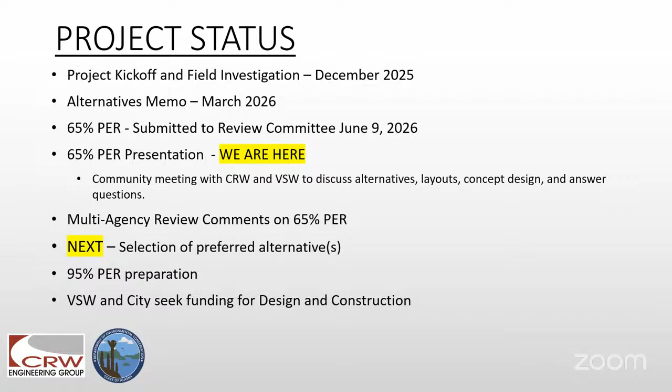We expect multi-agency review comments anytime. They are pretty stacked up. They don't send their comments in a very timely manner, it seems. But we hope to get those in August in concurrence with the same timeline as when the city will be making selections for the projects that they would like to pursue. Next.

I'll let Andy take over here and talk about the purpose of the project and then the suite of different components that are within the PER, including the dam, the water transmission line, the distribution mains, and the wastewater collection mains. So go ahead, Andy.

Thank you, Lori. Again, my name is Andy Horazdovsky, and I was out there in December, along with Mike Leganici, taking a look at these different items that are part of this preliminary engineering report. I was also out there in 2014 and 15, looking at some of the wastewater and influent issues into the lagoon, and took a look at the dam out there and the septic system.

So I've been over there a few times and I'm pretty familiar with the systems involved there, water and sewer. And of course, CRW was involved with the 2018 water treatment plant and water tank projects that occurred up there.

So this preliminary engineering report, usually these PERs cover one or two items. This one is unique in that Village Safe Water let the city come up with a whole list of issues that are persistent and need to be addressed, and it involves 10 different items relating to the dam and some water mains and sewer mains.

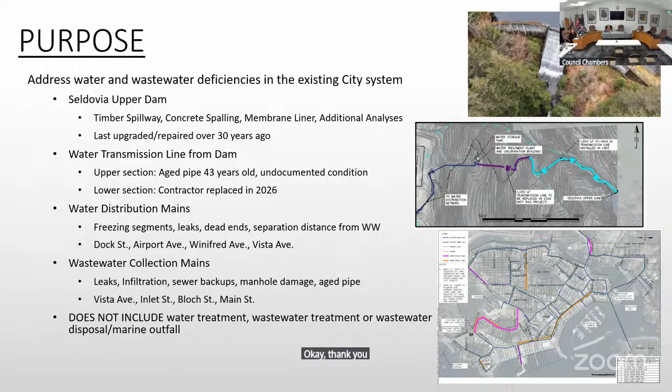Thank you. Oh yeah, for sure. If you had any other questions, don't hold back. We're at the beginning levels of planning these kinds of things, and input is appreciated.

So the Seldovia Dam, I was up there in 2015. That's a pretty unique structure. It's been there since 1954. It's got a plaque on there that says so, and I think it's unique to Seldovia. It's a neat structure and obviously critical to your water infrastructure. It's the only source of water.

The different items we want to cover in this preliminary engineering report are the timber spillway, spalling that's going on the dam, which is places where the concrete is deteriorating, and the liner that sits on the inside face of the dam. These items are all actually what were brought up in the PSI, that periodic safety inspection conducted in 2025. There's some additional analysis that was suggested to be completed in that PSI as well.

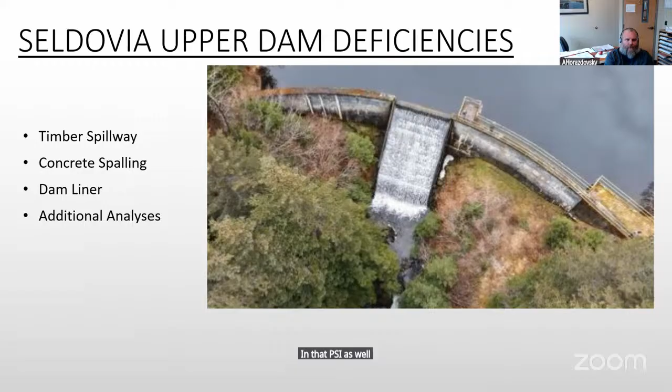Let's take a look at that timber spillway. Referencing my notes here too. So the PSI pointed out that the timber spillway, the spillway is the mechanism that the dam is allowed to relieve excess water. Not all of the water captured in that drainage needs to go in to be treated. Some of it spills over and continues on into the slough.

You can see one photo here provided from that PSI report. The timber spillway pushes that water away; if it were just to spill over the top of the dam, the water would start to erode the base of the dam and could lead to a structural failure. So the timber spillway is important. It kicks that water from the top of the dam away down into the stream bed, and it has some broken boards that eventually could lead to the failure of that spillway and erosion of the dam. We don't want to see that happen, and there needs to be a plan put in place to take a look at this.

Kind of big picture here, you're going to see that the way the PER is set up, we're encouraged at development of this to make alternative recommendations. Alternative one is usually a replacement scenario where deficient components are replaced. Alternative two is a repair scenario where you would repair, kind of short of full-on replacement, the minimum you would do to get the structure to continue to function normally, whether that be a sewer, a water main, or in this case, timber spillway. And then there's always the alternative of what would happen if we do nothing. That's kind of how VSW structures these documents, and that's why it's set up in this way.

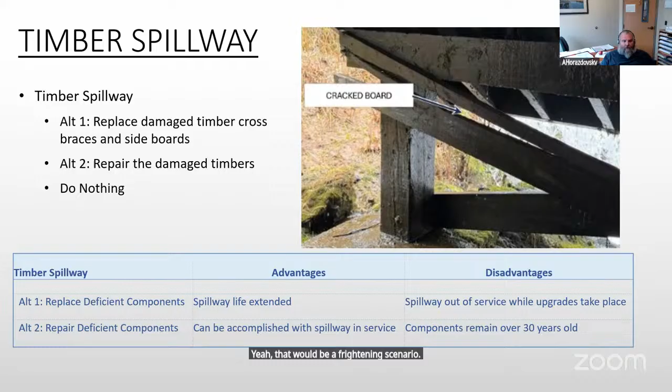So looking back, say 1954, the dam was completed. In 1994, they drained the entire reservoir, built a coffer dam, and completely overhauled the dam. They dealt with the concrete spalling, rebuilt the spillway, and relined the entire back of the dam with a new coating to protect it. So from 1954 to 1994, that was 40 years. In this kind of environment, we'd expect that kind of work to need to occur every 20 to 40 years. Sure enough, at 40 years, they did a major renovation. Now it's been another 32 years since 1994.

So I'd say it's time to start planning for that. The planning, getting funding, design, and gearing up to make these things happen takes a number of years, as you guys know. So at 32 years, I think it's time to start planning the next major renovation for the dam.

We see in the PSI pointing out concrete spalling. That's where the concrete has started to deteriorate from water getting in there and freezing, which cracks the concrete. If that spalling is not addressed, eventually it gets deeper, water gets further into the dam, freezes, cracks more, and you don't want to see it reach a level where it's interacting with the reinforcement, because if the rebar gets wet, it will rust and cause further spalling and cracking. These superficial issues become major structural issues.

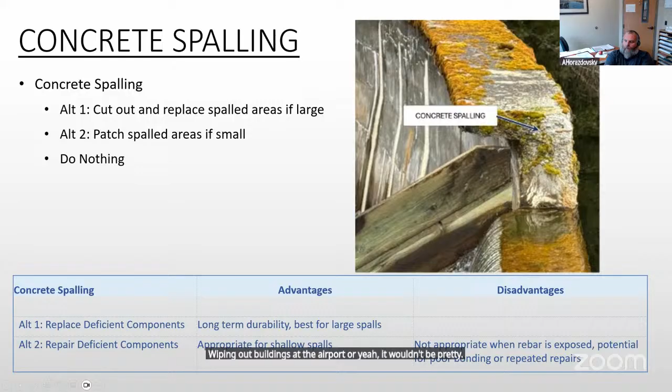The next component of the dam - the PSI also identified that the liner, they estimated 30 to 50% of the liner visible at the surface has deteriorated. You can see that black liner, and in places you're seeing bare concrete, which leads to additional spalling and water being able to penetrate into the concrete. That's the point of the liner, is to stop that. Sometimes we think of concrete as somewhat impermeable, but when it's constantly pushed against with water, water works its way in there and can deteriorate the rebar, so that liner is important to protecting the integrity of the dam.

We've got alternative one being: build a coffer dam, draw down the whole reservoir, fully deal with all the spalling, and fully replace the liner. Alternative two is, since most of the damage we can see from the surface is near the top, we'd just drain down the dam a little ways and address the major damage of the liner near the surface. But again, it feels like a band-aid kind of solution there. It's been 32 years since the last major renovation - probably time to look at a full-on rehab.

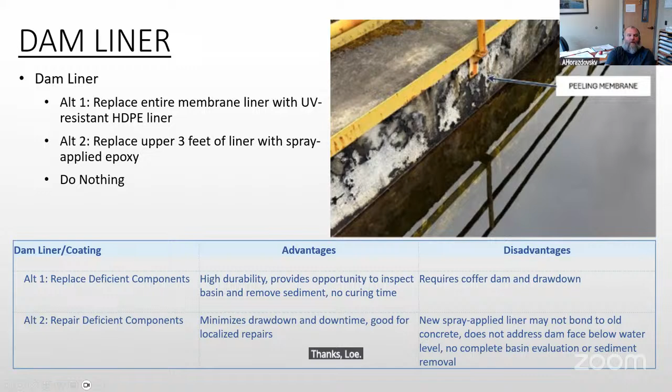So the water transmission line, we're kind of breaking this into two sections: the lower thin-walled steel section that was just replaced, 1,000 lineal feet, and the upper section, which is 1,800 lineal feet of ductile iron installed in 1983. The design drawings reported that it was to have an 18 inch minimum cover over it.

So I'm curious to hear from the city here, how did that replacement of the lower transmission line go? Through the mayor, do you want me to respond now? Yeah, you can just go real quick. Really well, super smooth.

We noticed major improvements at our water treatment plant once the new line, well, actually when the bypass was on, and then of course continuing with the new line, less sediment going into the water treatment plant from the raw water. You could actually see where that thin-walled steel was corroding on the inside of the pipe from use, and you could chunk it off with your finger, and where it was seeping into the ground. So it was overdue, and we're glad to have it done.

When they connected to the upper 1,800 feet, I did get a report back that the condition of that pipe looked good so far, and there weren't a lot of concerns, but of course that's just the bottom portion of that 1,800. So overall, that gives us hope that the upper portion of the 1,800 is still in decent condition as well. And right now, water coming into the plant has been greatly improved.

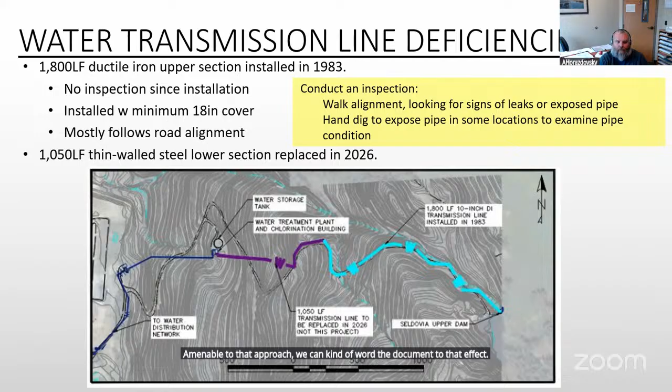So if the city is amenable to that approach, we can kind of word the document to that effect. That seems like a pretty reasonable approach. Yeah, makes sense. Okay, well, we'll do that.

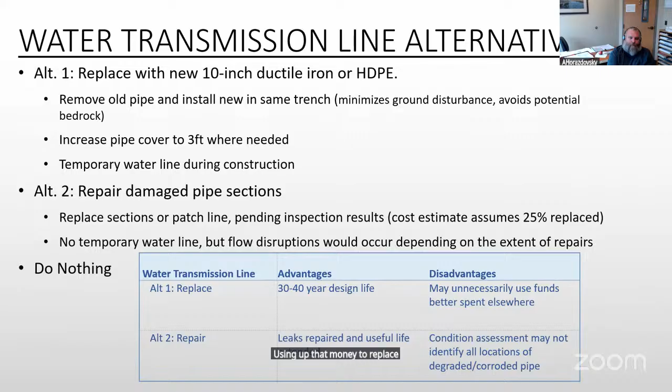I think right now what the report talks about is alternative one, which as always is a replacement thing. But if additional assessment determines that it's in reasonable condition and still holding up, well, then using up that money to replace that line would probably go against the books on another project that Seldovia could do that would be more useful. So we'll word things to recommend an inspection, or external inspection to the extent possible, and then camera inspection when the dam is serviced.

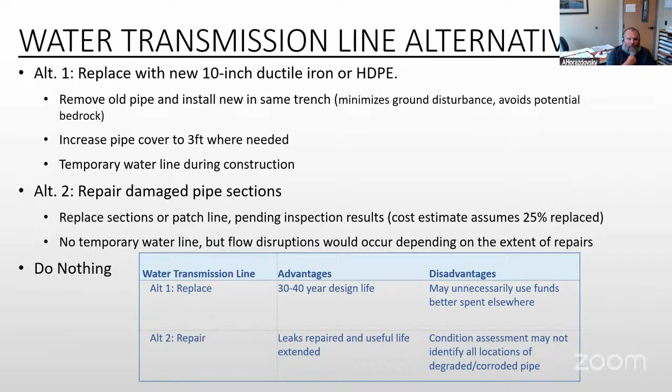So those were the major things covered in the dam section. Then we're going to talk about the water main deficiencies that the PER looks at, followed by the sewer main deficiencies. So, Dock Street.

We're going to talk about priorities and categorizing what is important to the city of Seldovia, whether they be issues like the dam, where if nothing's done it will continue to deteriorate. Those are important because they're protecting primary infrastructure. But then you've got deficiencies that cause the city continuous headaches, where on an annual basis you're digging up these things and unclogging lines. When it becomes such a maintenance hassle, that can cause it to become a bigger priority too.

So the Dock Street water main is 8-inch ductile iron. The record drawings indicate the burial depth could be as low as 5 feet. We know the fill material out there has a lot of blast rock and pit run, so it's easy for frost to penetrate and get to that dead end. It's a dead end water main, it just runs out and stops near the dock. So, with the limited usage that the city shop and offices put on that water main, it freezes.

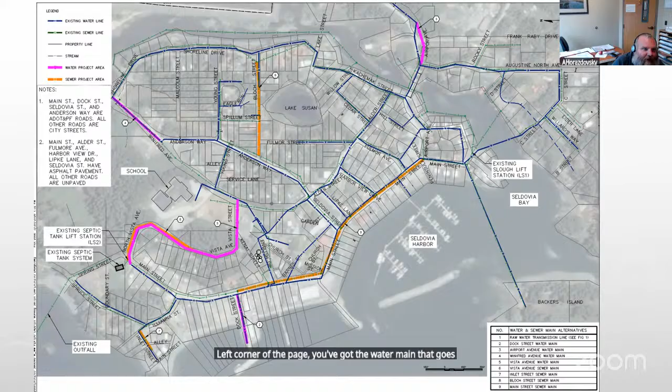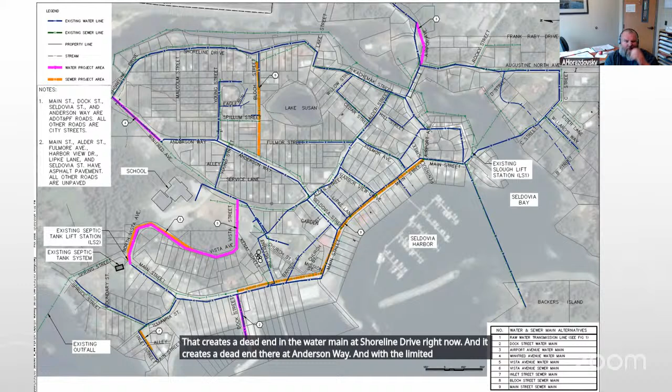So there's Dock Street down there at the bottom. Up on the top left corner of the page, you've got the water main that goes up Shoreline Drive, supposed to be connected to Anderson Way, but right now that's valved off on either end, near where the number 4 is pointing. That creates a dead end in the water main at Shoreline Drive, and it creates a dead end at Anderson Way. With the limited number of people on those dead ends, they can experience sediment getting stirred up when the city flushes hydrants. It's better and more efficient to have loops in your water system, and this right now creates two dead ends, which is something that should be repaired.

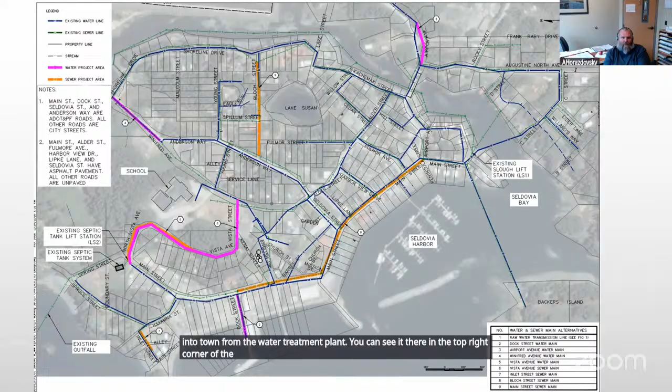Let's see, and then Airport Avenue. That's a section of water main that's the main line coming into town from the water treatment plant. You can see it in the top right corner of the page where the 3 is indicated. Our understanding is the actual road of Airport Avenue was shifted some years ago into its actual right of way, while the water main remained in its original location. Some development in that area caused a driveway cut through there, and the water main is a foot or less than two feet below the surface, uninsulated. It also has separation issues crossing the sewer main, and the water main's not in its right of way. This is the only water main serving the rest of Seldovia, so were it to freeze and break, that's going to be an extensive emergency repair.

So that's one of the things we're looking at, and the idea—probably the best course of action, which we'll cover shortly—is to relocate that water main into the right of way at an appropriate depth with required separations to sewer lines.

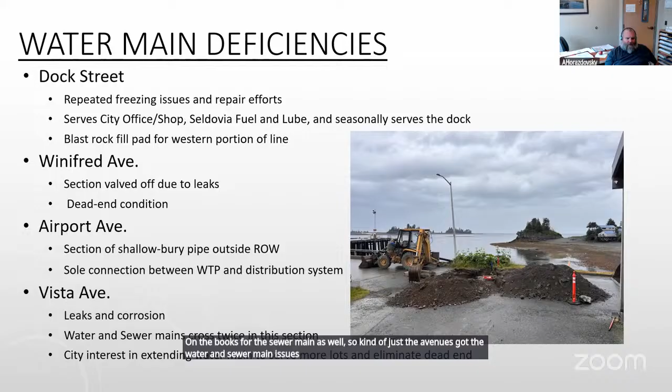And then finally, on the water main deficiencies, Vista Avenue—that's also on the books for the sewer main as well, so Vista Avenue has both water and sewer main issues. Right now, where the 5 and 6 point, the water and sewer extend about 700 feet up Vista Avenue and terminate up on the hill. We show the pink line snaking all the way down Vista Avenue and back down Vista Street, because one alternative is to connect the water main, creating a loop all the way through there. Right now it just extends up to the hill where residential development has ended; the street doesn't actually cut through there yet. That's one the city should consider—how valuable would it be to connect through—and we'll talk about that in more detail in a minute.

Oh yeah, and the water. Yeah, thanks, Lori. So I'm absolutely curious to see what the city thinks should be done.

For the Dock Street water main, alternative one would be to replace that entire length of water main. It's only 315 lineal feet, using Arctic pipe and heat trace.

Alternative 2 would be to excavate the existing main and add rigid board insulation above it, and probably on the sides, to try to protect it there. What are the city's thoughts on that? I know you've probably been thinking about it, considering you've dug it up twice recently. Go ahead, Heidi, you guys have talked about it internally.

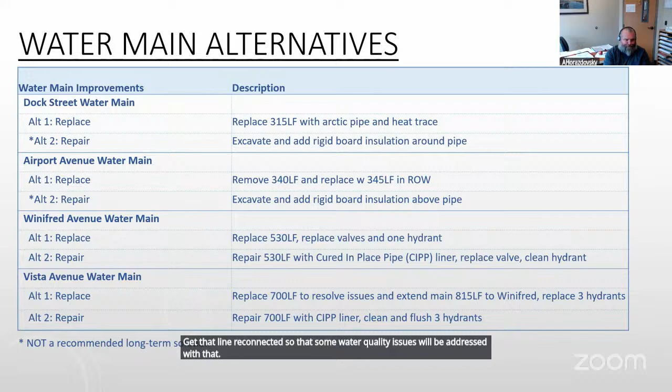Any thoughts on that? Yeah, I mean, I think from my standpoint, I'm an advocate -- that's how we got into this whole situation to begin with, deferred maintenance, right? All these Band-Aids over the years. Every small community in Alaska faces financial challenges, obviously. We've been super fortunate with the help of CRW, VSW, all agencies are super supportive. We seem to do okay over here, and we advocate for ourselves. We want to get the stuff fixed right, and we don't want to leave this problem on to the next generation. We want to do what's right here, get these things done, and get the long life out of them.

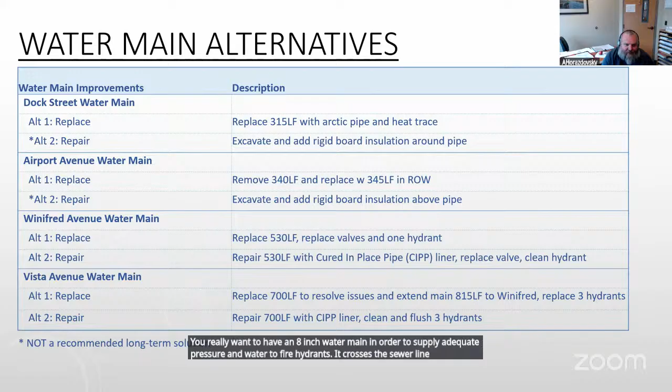Okay, sounds good. I like it. The Vista Avenue water main, it's a 6-inch ductile iron water main. It's corroded, it's had numerous leaks, including one that the city just repaired recently. You really want an 8-inch water main in order to supply adequate pressure and water to fire hydrants. It crosses the sewer line in 2 different places, so it's yet another one. I think the obvious solution is to replace that water main with an 8-inch main, and get rid of that leaky mess that's there.

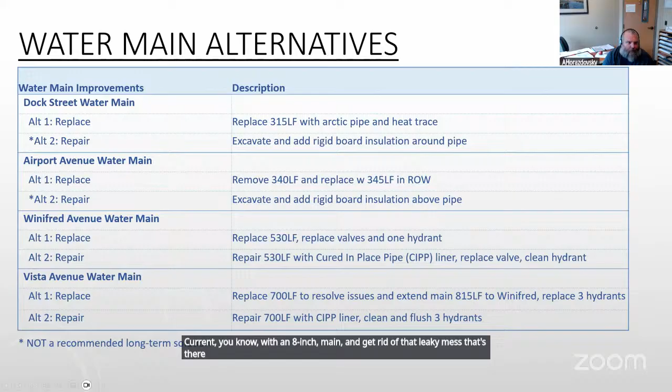No objections here. I did note in the comments I sent back that it was recommended to replace that pipe with ductile iron, and I was curious -- we don't need to discuss that now, but you'll see in my comments I was wondering why ductile iron versus HDPE. We could talk about that later, but just because I know that's such a corrosive area up there, it's definitely something to consider. No, that's a great point, and I think HDPE could be a good option there too. We can discuss the pros and cons of that when we have more time. Thank you.

So Vista Avenue, again, it's on this -- this is the sewer main deficiencies.

It's got... even when we were up there in December, which was when you'd expect the least I&I, we saw clear water flowing down. The city's had a history of seeing infiltration in this area. I think in the summer you would see a lot more.

It would make sense if you're going to do a project that if you're going to deal with the water main, Vista needs water main dealt with. You would tackle the sewer at the same time and fix those water and sewer main crossings.

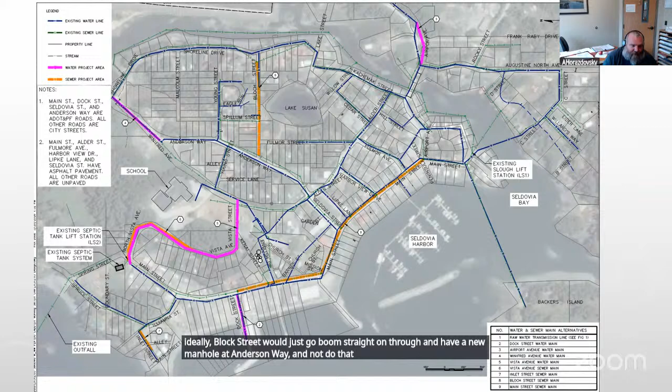That replacement would allow the main to be realigned, buried and protected. Like some other work that's been done, we've done in Seldovia, it goes across kind of a wetland area there. It would need to be probably supported on piles. So it is expensive work, but the city deals with issues there frequently, and a 2-foot burial depth of sewer is pretty hard to put a Band-Aid on.

Inlet Street, that is just a short section of sewer main that from what we talked about with the city, it sounds like there may just be a service line that has a problem over there. At the end of Inlet Street, down there in the bottom left corner, there's a clean out. We tried to find that while we were down there, and everything was frozen. The ground was frozen, and the city and CRW were unable to locate that.

I think, to me, the next step is to find that clean out and jet that line. Again, it seemed like from what we were talking about with the city, there was really just the one person at the very end of Inlet Street experiencing service issues, potentially just a service issue rather than an actual problem with the main in Inlet Street.

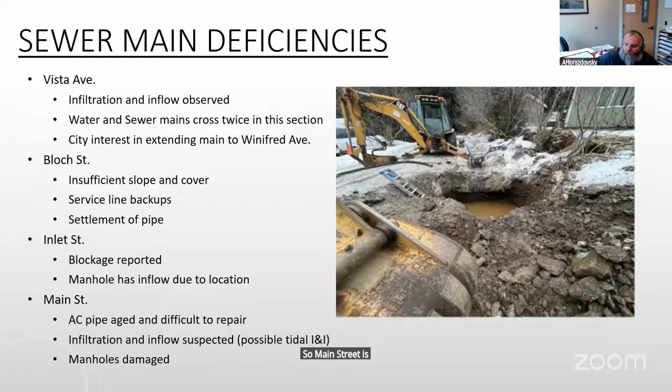Main Street. So the Main Street sewer collects 98% of all of the wastewater in Seldovia, ends up flowing down Main Street. It's got Harborview Drive and Seldovia Street and English Drive all tying into it, including the entire slough that comes into it from lift station 1 at the end there.

When we were down there, we wanted to go run all the way down Main Street and pop all the manholes and kind of look at increasing flows as we step down there, and just kind of gauge some of the infiltration that might be occurring. But a lot of the manholes were inaccessible due to damage from snow plowing, which beat up the rims of the manholes where the manhole covers aren't removable.

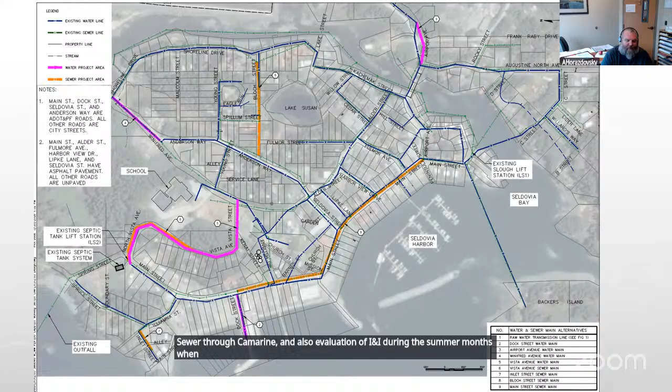Replacing the Main Street sewer is obviously a massive undertaking. It has dozens of services and all of these side streets that come into it. So I think moving forward, an investigation of the condition of that sewer through camera, and also evaluation of I&I during the summer months when I&I is actually more prevalent, is additional study that needs to be done on Main Street before you can really just say, oh yeah, we should replace this.

So I think that's where we stand on the Main Street sewer, and we're happy to take a look at what we've got worded in the report now. I think that's the clear course of action that needs to happen now: further specific investigation into I&I and the condition of the Main Street sewer main needs to occur before a solid recommendation on replacement or lining it can be made.

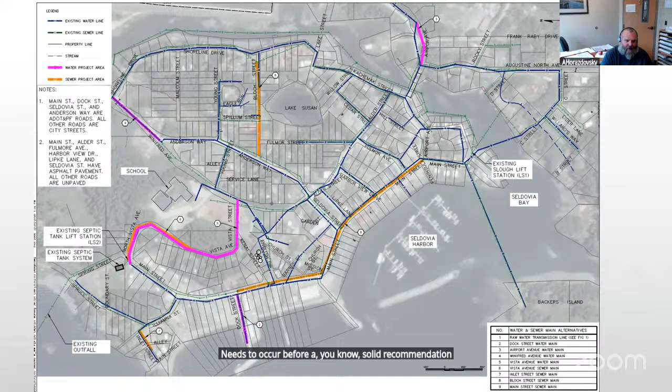Yeah, I'm pretty sure that's our only option. I mean, given that that's all State of Alaska DOT road too, they're going to be a major player in that one, because that's going to be an entire street torn up the entire length of the town.

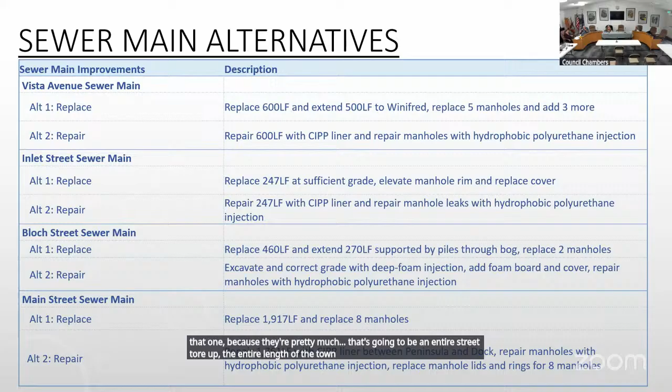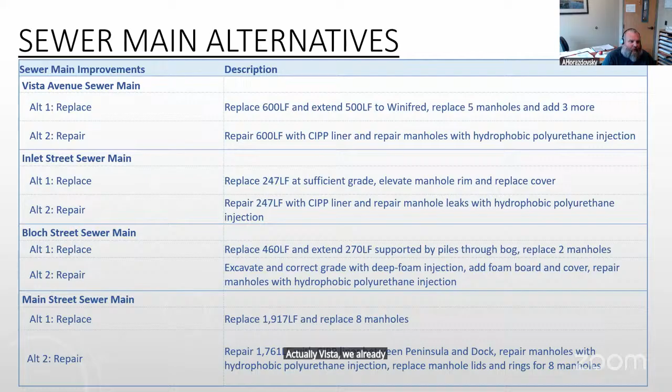Maybe at first it would just be an itemized list from 1 to 10 of what the city finds most important. But then ultimately they need to be things that would be grouped together, like obviously if you're going to do the dam liner and the spillway, you would just bundle that into a project, so a contractor can mobilize and get all the stuff together. It makes sense to group these projects together into manageable chunks that we can also use to seek the funding needed to do these projects.

It's about breaking these projects into bite-sized pieces that are accomplishable through pursuing grant funding through various means, including VSW and others - breaking these projects down into priority, but also by components, like Vista water and sewer, that could be grouped together, and then we see where that falls on the city's priority list. That's what we want to do as we move this to 95%: do a good job helping the city find a path forward on what's the most important thing we should go after next, and what things go together with it.

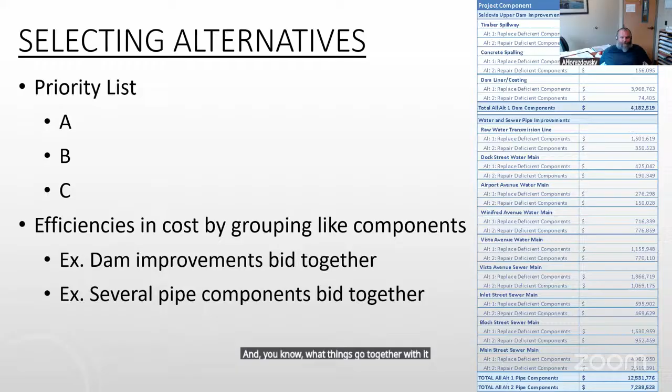So what is our timeline here for getting - so you've submitted your initial comments back to these guys?

Correct, Mr. Mayor, but it was more detail oriented, not priority wise. So if you guys want to have another work session to discuss priorities, we could do that, depending on what your timeline is, Andy and Lori and Michelle.

I would think that - and Lori, feel free to weigh in - yeah, we'd love to see the multi-agency review comments. And of course the city will get those at the same time we do. Maybe we digest those for a week or so, and then kind of meet. I'd be happy to meet back with the city again and discuss, start making a priority list of how this would be broken down. I think that would work good.

So I think that if the city could digest this information, come up with some priority projects from these options in the next month or so, Andy or I can be available to help with some of the specifics of that, or if you have questions, you could compile a list and we could get some answers back to you in pretty short order.